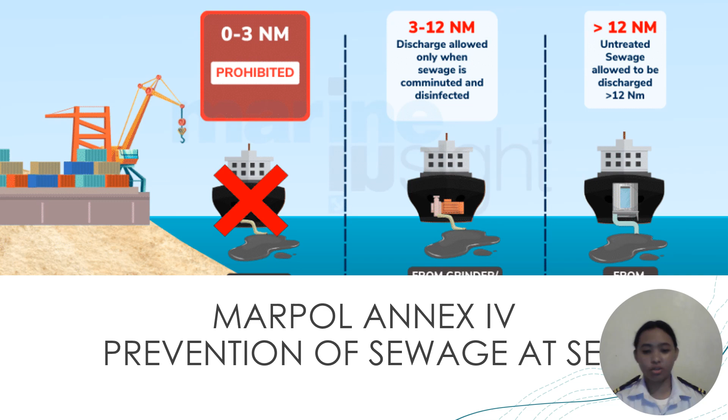So first, let us have the introduction. MARPOL Annex 4, part of the International Convention for Prevention of Pollution from Ships, focuses on managing and controlling sewage from ships to protect our marine environment.

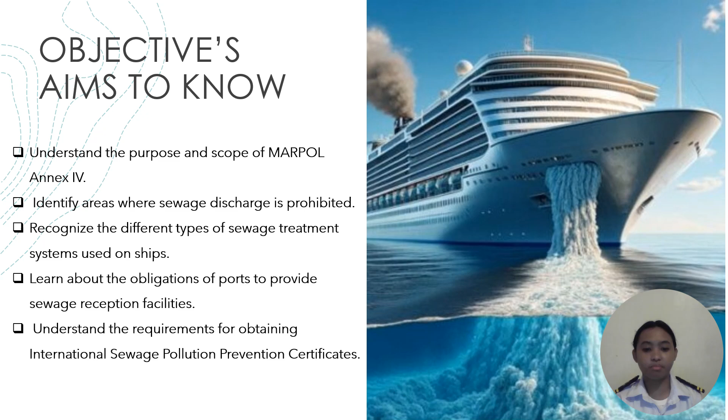The objectives aim to understand the purpose and scope of MARPOL Annex 4, identify areas where sewage discharge is prohibited, recognize the different types of sewage treatment systems used on ships, learn about the obligations of ports to provide sewage reception facilities, and understand the requirements for obtaining International Sewage Pollution Prevention Certificates.

Now let us have the overview of MARPOL Annex 4. As I've said earlier, MARPOL Annex 4 is a crucial part of the International Convention for the Prevention of Pollution from Ships. So what is MARPOL Annex 4 all about? It focuses on sewage management.

Now let us define what sewage is. Sewage refers to waste water or waste materials. The sources of this sewage are the toilets, urinals, medical facilities, and other sources on ships.

The purpose of Annex 4 is that we need to manage this properly in order to avoid polluting our oceans.

Now we have the definition of key terms: sewage, holding tanks, and nearest land. A holding tank stores this sewage until it can be treated or safely disposed of away from the nearest land to prevent pollution. A holding tank refers to a container on a ship used to store sewage until it can be properly treated or disposed of when the ship is far enough from the land.

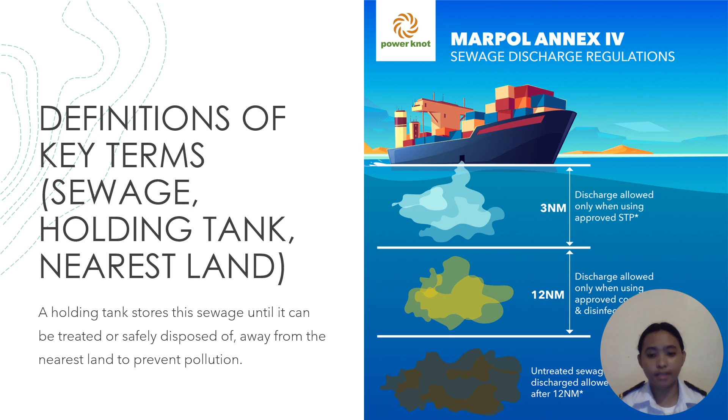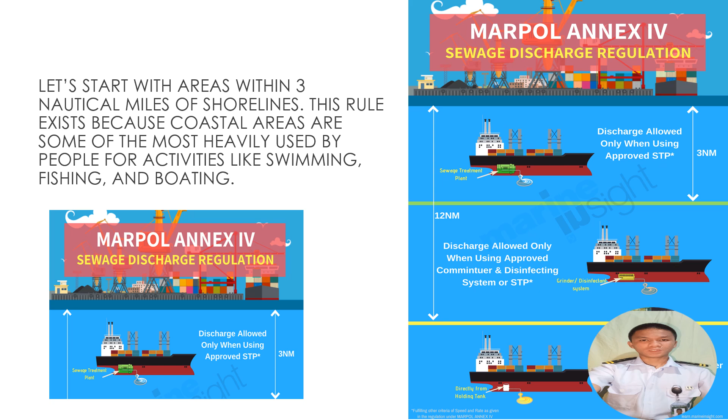Let's start with areas within 3 nautical miles of shorelines. This rule exists because coastal areas are heavily used by people for activities like swimming, fishing, and boating. For example, consider a popular beach town like Boracay in the Philippines. This area attracts swimmers and tourists year-round, and sewage discharge here would pollute the water, making it unsafe for people and damaging local marine life. By prohibiting discharge within 3 miles of shoreline, we protect water quality and reduce the impact on fish, plants, and animals that live close to shore.

Second are the designated special areas. Certain regions around the world have been classified as special areas by the International Maritime Organization because they are especially vulnerable to pollution. The Baltic Sea is one of these areas; it is almost completely enclosed by land with limited water circulation, making it especially prone to pollution buildup. As a result, sewage discharge in the Baltic is either highly restricted or banned altogether. This helps prevent environmental damage and keeps the sea healthier for local communities and the diverse range of marine species that live there. Additionally, other special areas include the Mediterranean Sea, the Black Sea, the Red Sea, the Gulf area, the North Sea, and the Antarctic area.

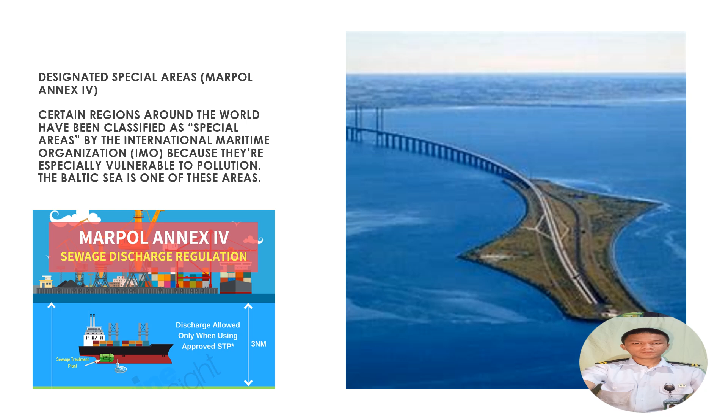Lastly are the enclosed or semi-enclosed waters.

Enclosed or semi-enclosed waters like bays and lagoons are areas where water circulation is limited, meaning pollutants don't disperse as quickly. A well-known example is Chesapeake Bay on the US East Coast. This bay has limited water exchange with the open ocean, so if sewage is discharged here, it can linger, leading to buildup of pollution. This harms water quality and can lead to oxygen depletion, which negatively impacts fish and other marine life. By prohibiting sewage discharge in enclosed or semi-enclosed waters, we help prevent long-term damage to this ecosystem.

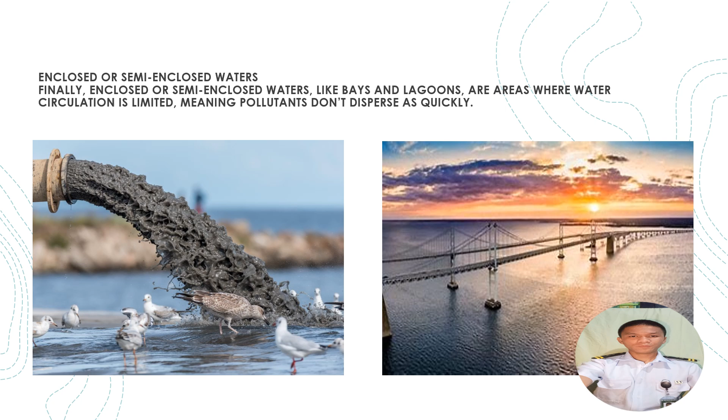That's all for prohibited areas for sewage discharge. The next topic is the conditions for discharge.

First, let's discuss where ships can discharge sewage. The general rule is that ships must be at least 3 nautical miles from the nearest land before they can discharge any sewage. This distance helps protect coastal waters from pollution. There are special areas like the Mediterranean Sea and Baltic Sea where rules get even stricter. In these areas, untreated sewage cannot be discharged at all, no matter how far you are from shore. Instead, ships can only release treated sewage that meets specific standards.

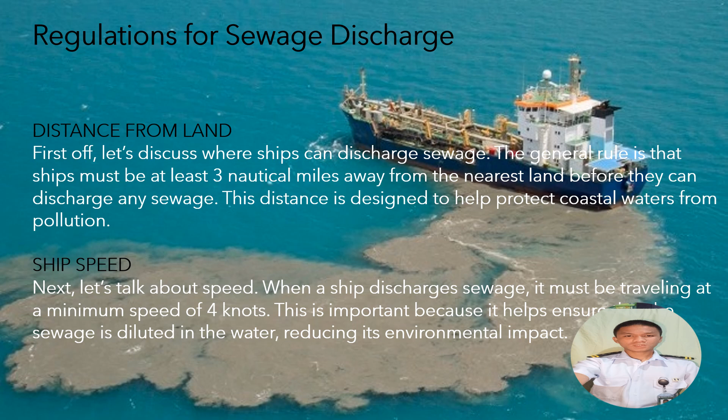Next, let's talk about speed. When a ship discharges sewage, it must be traveling at a minimum speed of 4 knots. This is important because it helps ensure sewage is diluted in the water, reducing its environmental impact. So if you're on a ship and hear the captain say, 'We're about to discharge sewage,' you can check the speed. If it's under 4 knots, something might be off.

Next is treatment requirements. Not all ships have the same capabilities when it comes to sewage treatment. Ships equipped with an approved sewage treatment plant can discharge treated sewage, but the effluent must meet specific standards: biochemical oxygen demand should not exceed 25 mg, total suspended solids must be below 35 mg, and fecal coliform bacteria levels can't be over 100 per 100 ml. These standards ensure that what's released into the ocean is as clean as possible.

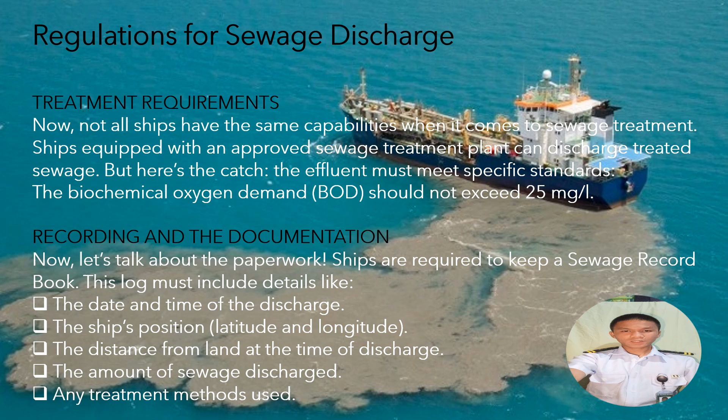Next is recording and documentation. Ships are required to keep a sewage record book. This log must include details like the date and time of discharge, the ship's position (latitude and longitude), the distance from land at the time of discharge, the amount of sewage discharged, and any treatment methods used. This record is crucial for accountability and can be checked during inspections.

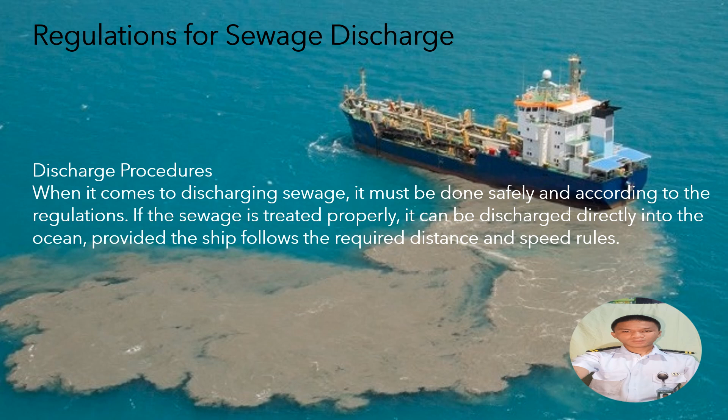Lastly, when it comes to discharging sewage, it must be done safely and according to regulations. If the sewage is treated properly, it can be discharged directly into the ocean, provided the ship follows the required distance and speed rules. That's all. Thank you.

Hi everyone, I will discuss the equipment and system requirements under MARPOL Annex 4. First, let's talk about the types of sewage treatment systems used on ships. There are mainly two types: the sewage treatment plants and the comminuting and disinfecting system.

Sewage treatment plants handle the discharge of raw sewage into the sea from sources such as medical facilities, toilets, urinals, and other areas that can create a health hazard. This can also lead to oxygen depletion and can be an obvious visual pollution in coastal areas, a major problem for countries with tourist industries.

The main sources of human-produced sewage are land-based, such as municipal sewers or treatment plants. However, the discharge of sewage into the sea from ships also contributes to marine pollution. These systems are designed to treat sewage on board, making it safe to discharge into the sea.

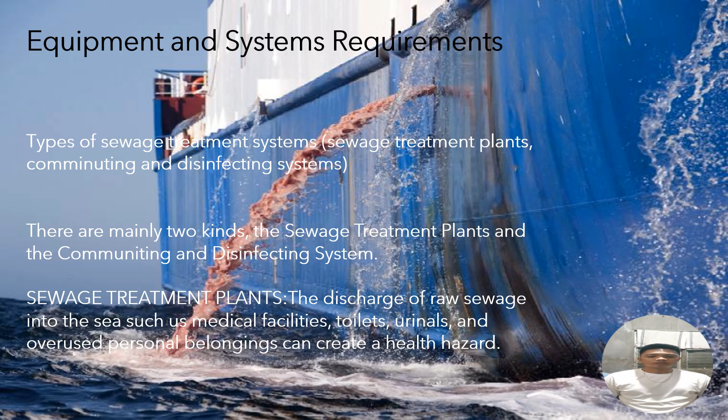Comminuting and disinfecting system: this system grinds up the sewage and then disinfects it, also making it safe for discharge.

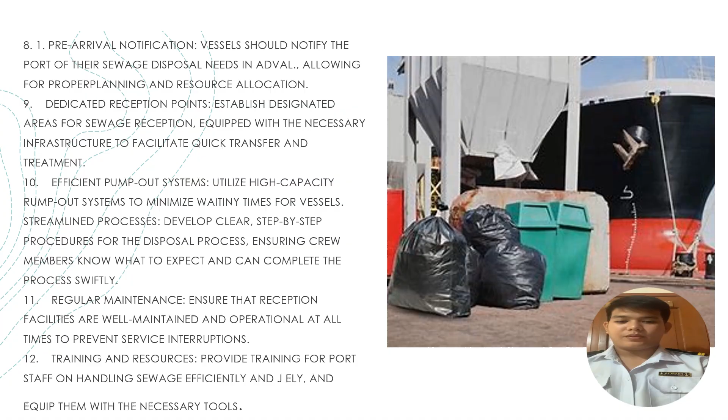The International Sewage Pollution Prevention Certificate, ISPP certificate, is essential for ensuring compliance with the International Convention for the Prevention of Pollution from Ships, MARPOL, specifically Annex 4.

First, regulatory framework: MARPOL Annex 4. This convention sets the standard for the prevention of pollution by sewage from ships. National regulations in individual countries may have additional requirements aligned with MARPOL.

Next, issuance process. Application: ship owners must apply to a recognized organization, for example a classification society, for the certificate. Documentation: submit necessary documentation including the ship's design and operational details, and details of the sewage treatment system on board.

Next, compliance with technical standards. The sewage treatment system must meet specific performance standards, for example disinfection levels and operational procedures, implementation on board, and procedures for sewage management.

Next is surveys and inspection. An initial survey before issuance requires a thorough inspection of the sewage treatment system. Periodical surveys involve regular inspections, typically annually, to ensure ongoing compliance.

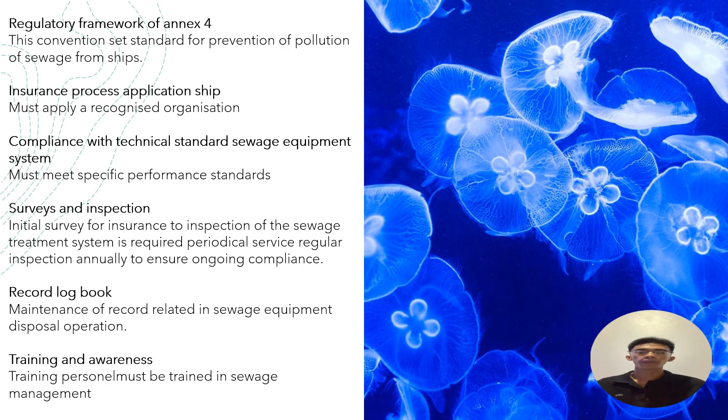Next, training and awareness for crew. Personnel must be trained in sewage management and compliance with survey procedures and compliance checks for International Sewage Pollution Prevention certificates, involving several key steps to ensure adherence to MARPOL Annex 4 standards.

First, pre-survey preparation: documentation review. Collect and review relevant documents, including ship technical specifications, previous survey records, and sewage treatment system manuals. Crew training: ensure crew members are familiar with sewage management procedures and record keeping.

Next, initial survey: physical inspection. Conduct a thorough inspection of the sewage treatment system, including condition and functionality of the system, compliance with installation requirements, and system testing performance - an operational test to verify the sewage treatment system meets performance standards. Review procedures: evaluate on-board procedures for handling sewage, including discharge protocols.

Number 3 is operational compliance check. Logbook verification: inspect the ship's logbook to ensure accurate record keeping of sewage treatment and discharge operations, maintenance activities, and any malfunctions. Crew interviews: conduct interviews with crew members to assess their knowledge and adherence to sewage management practices.